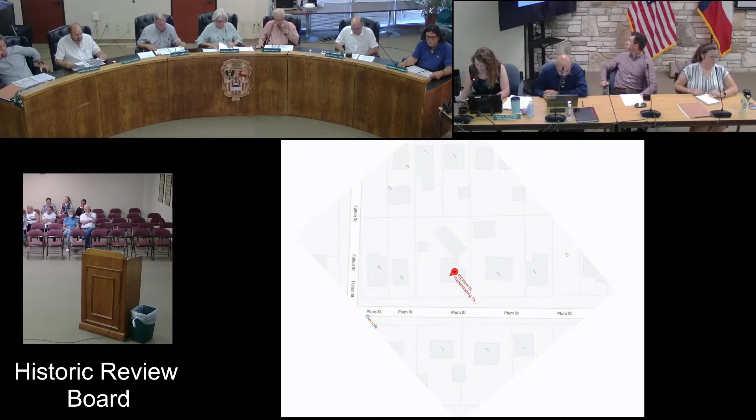The biggest change has been the enclosure of the front porch, and the applicant is proposing to rehabilitate the front porch, which will enhance the integrity of the structure. The structure deserves preservation and protection from future demolition with a medium rating. Medium properties retain their historic integrity to a good or moderate degree.

The outbuilding does not appear on the 1938 Sanborn map and is not considered original to the house. This structure can be removed with the current low rating, so staff does not recommend re-rating of the garage outbuilding.

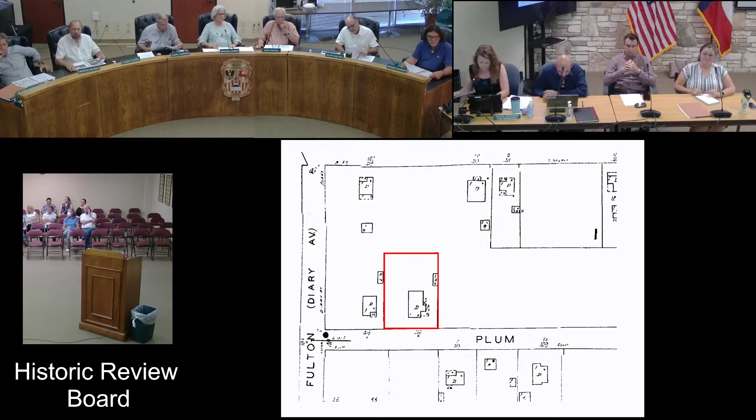Issue. All in favor, say aye. Okay.

To application 2162.

Chairman, I want to clarify the re-rating is a medium with the exception of the garage. I guess we should have included that in the motion. Yes, I think we should have. Do we have to go back and make another motion? It was in the application that way. Oh, okay, I'm sorry. So is it okay the way it is, or do I need to do something, Daniel?

And what was your recommendation? Did it recommend that? The request was a re-rating of the main house, not the back house, so you didn't change the rating of the back house - it will retain the low. I thought the rating covered the whole property, so we'd have to separate out... We did that.

Okay, I think in the documentation we were clear. If the board wants to clarify, you have to have a motion to go back and reopen that item, and then you could make another motion to clarify if you wanted to. If Anna doesn't think we need clarification, I think we're okay.

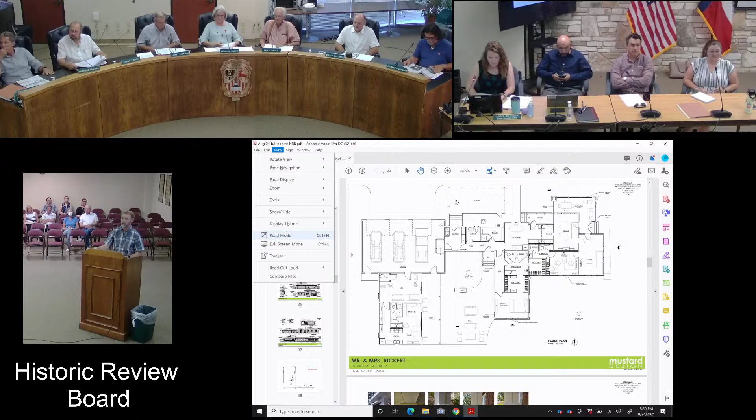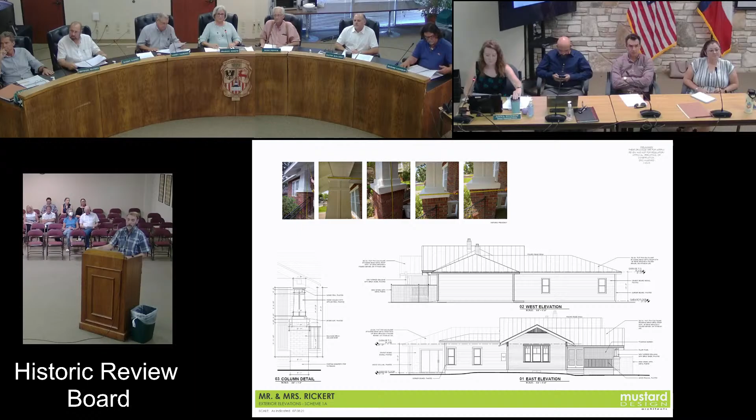When we restore the front porch, the two footings for the columns are still in place, and you can even see the ghost marks from the brick work that was on those footings. So we have a pretty good idea of what those columns looked like, and we found similar columns to use as a model for putting those back. That'll be a fun restoration project.

Our square footage at the back of the property uses a hipped roof with a low pitch to keep it low and out of sight as best we can. I think that's all that really needs to be said about it, unless you have questions for me.

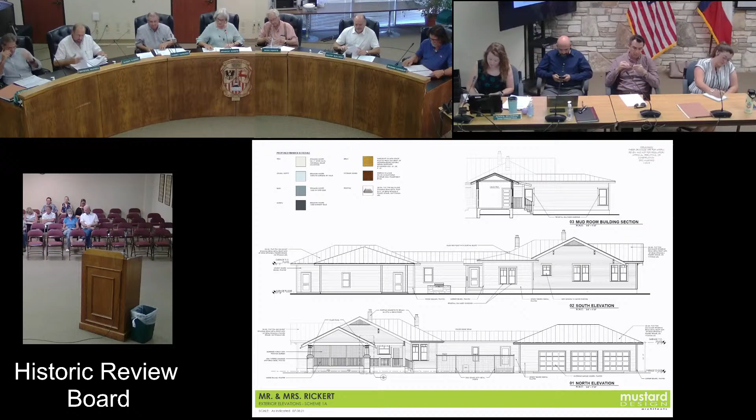Moving on to 209 East San Antonio. Application 2185 at 209 East San Antonio is in the central business district zoning, and it's a high-rated property.

The applicant is requesting approval to re-rate the following to allow for demolition and removal: the open-air shed in the rear of the property, the 1950s rear addition, the greenhouse added for the florist, and the water feature. The main structure's exterior character will be maintained, cleaned, and painted. Repair the existing wood ceiling on the front porch to match existing.

Remove the existing concrete ramp and railing and replace with an ADA compliant concrete ramp in the configuration shown. Replace the existing aluminum front porch material with tongue and groove cedar decking in a similar orientation. Repair existing original windows as needed on the front of the house, including replacing plexiglass panes with single pane glass. Refinish and stain the existing front door and side lights, flipping the door swing to open out for egress. New pass-through window from the inside bar to the outdoor deck at the existing window opening on the side. Paint the existing house siding and trim as shown.

I: paint existing metal roof. J: replace rear window with door for kitchen access. And looking for a conceptual approval of the new concrete site walls with fence on top of the street side

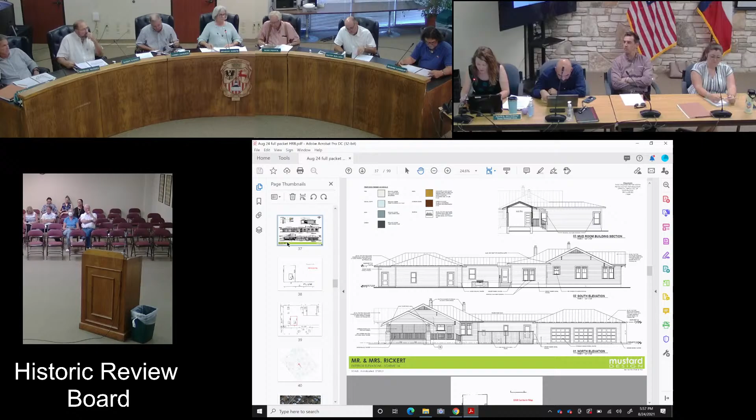Is there a representative from the property? That's okay, as long as you can answer our questions.

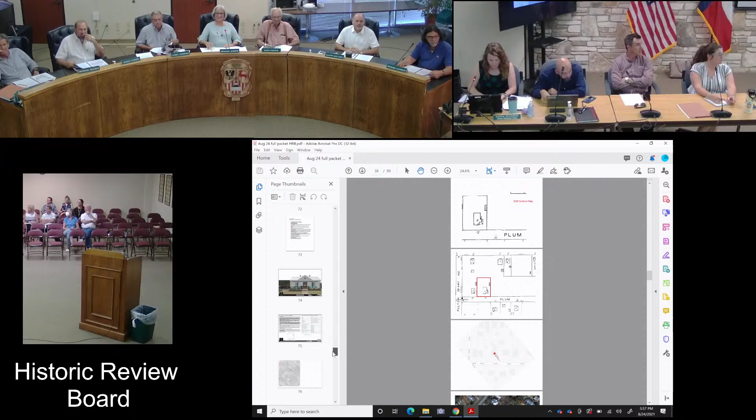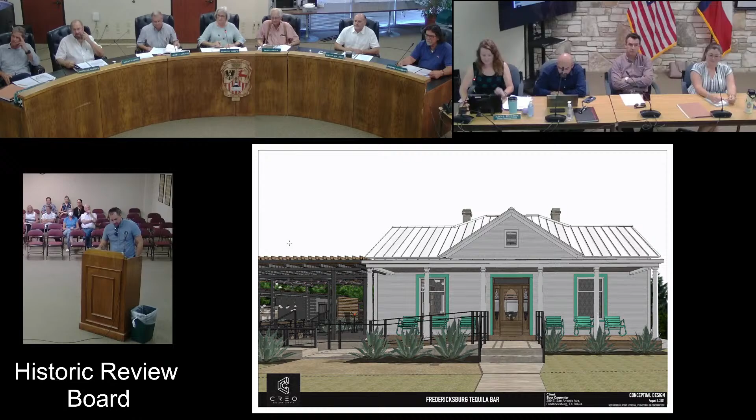He's under the weather, he's ill. He apologized he wasn't able to make it, but I'm Maurice Flores. I'm with the architects working with him on the project.

Do you want to address anything that Anna said? I do. We've been working closely with Anna on this project. We had a preliminary meeting with the board, with the city as well, to address a lot of concerns.

So some of the things, just to quickly go into that: we were providing parking in the back, which is not existing there. There's an old shed that will be demoed out, but because this is going to be more restaurant bar use, we were providing additional parking to the rear.

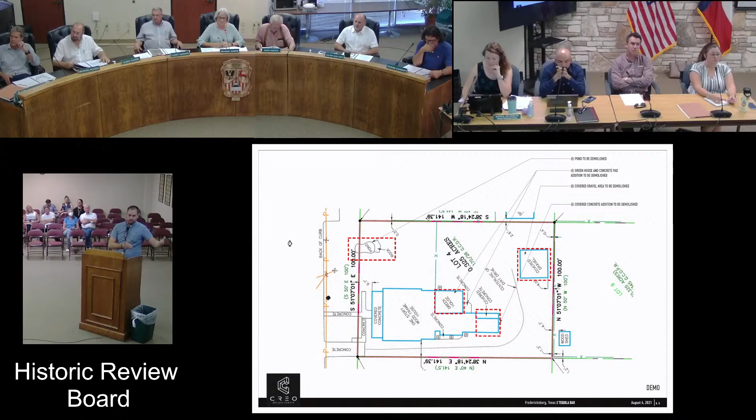One of the feedback comments was that the original drive is too narrow for access, and they wanted us to have additional access, so we ended up borrowing more of the buildable area that was going to have the pergola and the trellis. We added an additional drive lane onto the opposite side of the house, a 12-foot drive lane, as you can see in the drawing up there on top.

With that it makes our outdoor bar and seating area a little bit tight, especially when you're walking out there on site. So, to my question in talking with Anna - you've discussed that the pergola is a little too close to the existing structure and you're afraid of it obstructing the original facade, which I completely understand. We are creating no walls on the outside of that outdoor structure, so from the street you can see the existing facade more so now than you currently can.

Because of the tree, a lot of it's in shade and obstructed by overgrowth, which will all be cleaned up. The tree, which is not shown on there, we're still in question if we can maintain it with the construction. The last time I spoke with the client, we would like to try to keep it. We'll raise up the canopy way above just to allow light to shine on that area.

With the trellis, my question to you, Anna, would be how far is acceptable to pull it off? Because we are limited on space and we're trying to utilize as much of it, but with respect to the house.

I don't know that I have a direct or exact dimension, but I think that corner is of the biggest concern because that's kind of blocking the view from the street. And as we mentioned before, we've seen this at other restaurants around town, such as Tubby's, that came in initially just as outdoor seating, and then over time it becomes enclosed because to make money they need comfortable space. So knowing if we've got a framework there that can easily later be enclosed, that would be a concern as well.

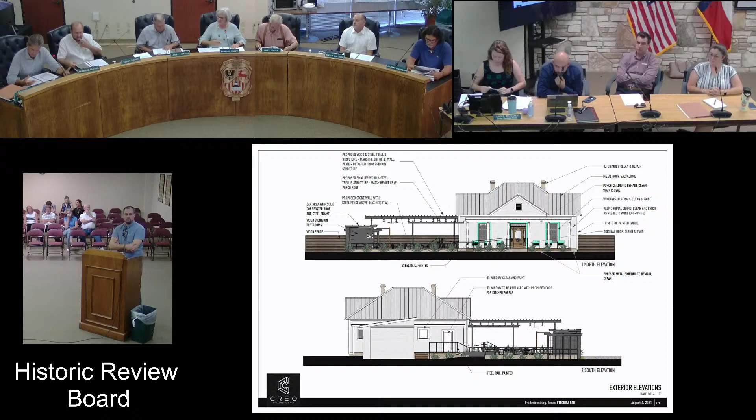We can do it all as one, or we can pull line items out, however you want to do it. Are there line items that you're concerned about that the architect may be able to address? For the setback - was there a setback he's proposing of the trellis from the original structure?

So the trellis right now, there are two portions of it. There's one that's coming off - I guess I can't point to it. We can see it here - the smaller trellis, okay. If you want to come over here and point.

Well, the application is for the conditional approval or conceptual approval of the pergola, right? Not the absolute dimensions, as the city has recommended. So you would come back with more refined drawings and profiles. Yeah, we're trying to get conceptual approval so we can make sure we're rolling the right way before we proceed too far.

So tonight, all you need is a conceptual approval of some type of trellis out to the east side, correct? Okay, we're still going to bring back our permit and have to - but still answer Michael's question about the pergola and the trellis. What would you repeat - there are two different trellises.

One is tying off the main front porch, and that's because our ADA ramp is coming down to this lower level, which is only about 2 feet off the ground, and then we'll work that out with the contractor on the final grade. So we do have an ADA ramp and some steps to get down from the main porch to the other area.

This short little pergola is paying attention to our main porch height, so it's in the same dimension and plane elevationally. Then it steps back and we raise up to about the wall plate of the existing structure for the main trellis, which will step up in the same front plane from the wall back. Over here where the outdoor bar is, we have another element tied into this same massing.

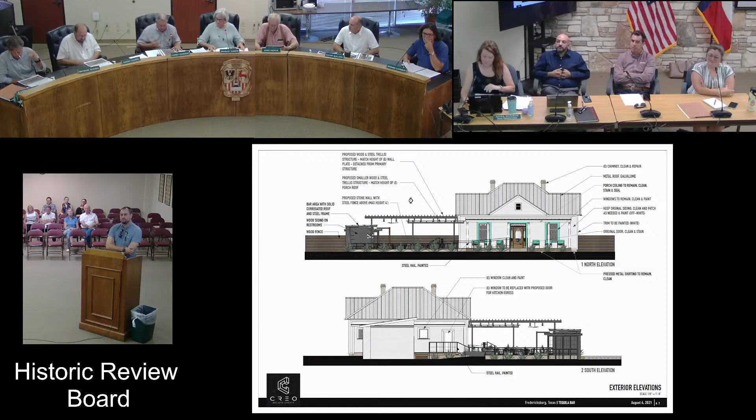At the rear of the lot, where the parking is, are you going to put any kind of barrier fence on your back property line? Yes, sir, there will be a fence, and I believe we can go up to 8 feet, solid. Is that a nice residential area behind you? Yes, sir, and I was going to comment on that—anything you could do to dampen the noise with vegetation and fencing, I'm sure the neighbors would really enjoy. On the parking stalls side we're limited on space for vegetation, but on the other side of the drive aisle we can introduce more once we have a landscaper on the project.

I noticed on your drawings you're showing a ridge cap instead of a turned ridge. Typically on a standing seam roof, the board likes to see a traditional turned ridge. Okay, and as far as the acrylic, I hate to see that—maybe there's something else you could do besides just plastic with a bunch of leaves on it. Well, you have to maintain and clean it pretty often, but that depends on whether that tree stays. Right, the tree to the south near that parking, we will maintain and keep.

I'll make a motion to approve application 2185 in keeping with staff's recommendations, items A through J as recommended by city staff, inclusive of the conceptual approval of the new construction as outlined. Okay, thank you, David. Second? Second. Thank you, Larry. Any discussion, board?

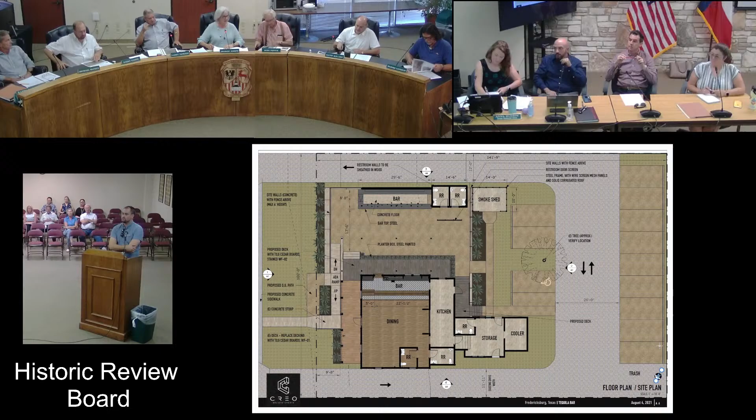And David, just making sure your motion is based on the staff recommendations. Yeah, exactly, by staff recommendations, all items. Call for the vote—all in favor, say aye. Aye. Opposed, same sign. Great, thank you.

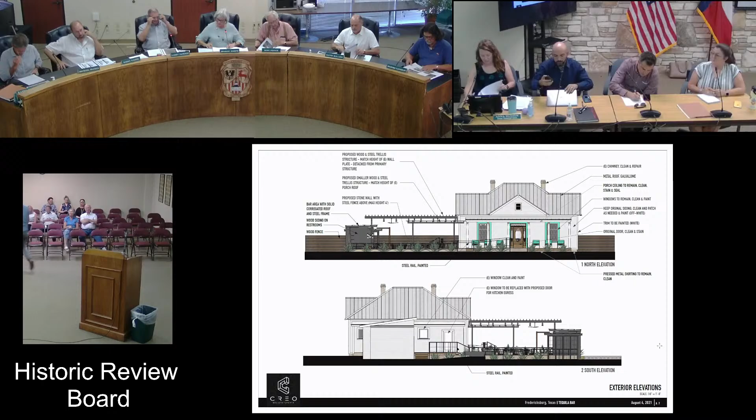Other discussion items, item 8 on the agenda. Jason? Yes, thank you, Chairman, board members. I had a chance to discuss privately with a few of you at the last meeting, but we are moving forward with rewrites of possible amendments to our STR ordinance. I think one of the biggest areas of concern regarding your purview has been the R2 lots—we've seen a lot of density come in.

Currently the code allows up to 8 units, which would be 8 parking spaces. I know several projects have come through and y'all felt that's a little bit dense. Y'all have had concerns or questions on whether you can approve or deny those. One on San Antonio had hot tub spa areas. Ultimately that went to council and was denied outright.

So thinking about densities in our R2 areas in our historic district, looking at the existing R2 along San Antonio around the middle school, almost all of it is single family neighborhood product. It's never made that conversion to multifamily.

So what staff is seeking is maybe just a quick email from y'all if you have any thoughts on your preferred densities. Staff has some thoughts on what other cities are doing and what we'd recommend. We want to give applicants flexibility to design how they want those spaces to look, but we don't want to get into situations where we're trying to fit 8 small houses on a lot, whether they're efficiencies. So there's been conversation about whether it's one main structure per 5,000, 7,000, or 8,000 square feet - what is that ultimate density brought down to?